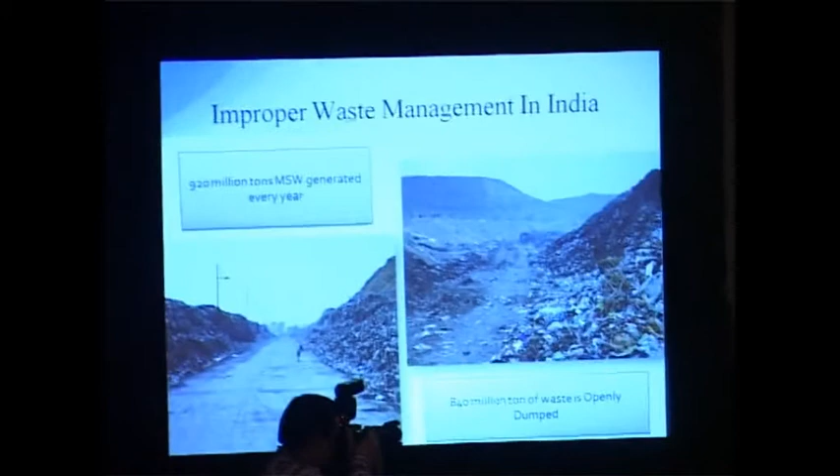Talking about the Indian scene, where 920 million tons of waste is generated every year, and out of which 840 million tons of waste is openly dumped, solid waste management becomes a challenge in the Indian scene. Here we are left with two options. Either extract the energy from the mixed waste, which contains toxic and inert material and significantly low calorific value, or process it beforehand before mixing it.

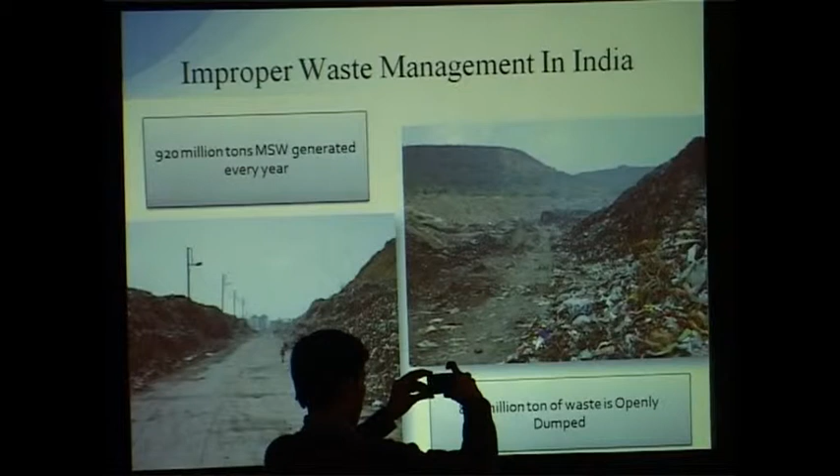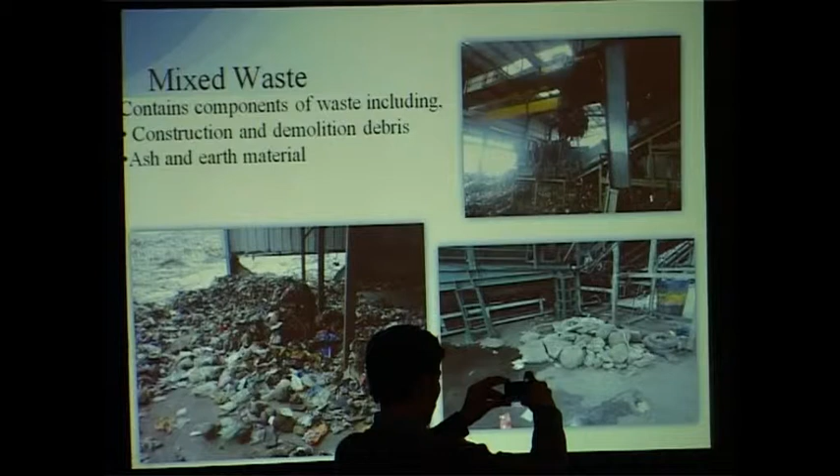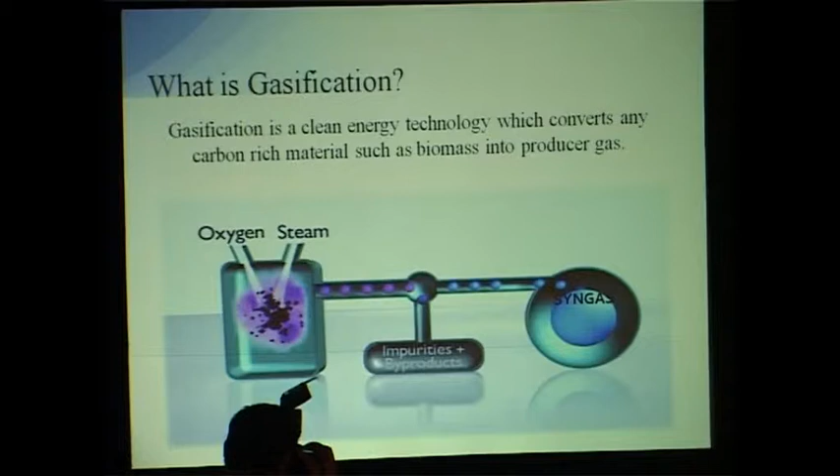Also, one of the most compelling challenges which the 21st century faces is to extract energy and meet the national and global demands while minimizing the impact on environment. Gasification is what we suggest and can help us meet those challenges. What is gasification? Gasification is a clean technology which converts any carbon-rich material, such as biomass, into producer gas, which can further be used as cooking gas. Now the question is, why only gasification?

RDF, which contains low calorific value, makes it difficult to utilize it for energy extraction. Biomethanation requires pure organic waste as feedstock, which is the major challenge in the Indian scenario. Coming to incineration, the emission of air pollutants such as ash contents further deteriorates the atmosphere, whereas landfill requires large and secluded areas. And in biocomposting, heavy metals enter into the food chain.

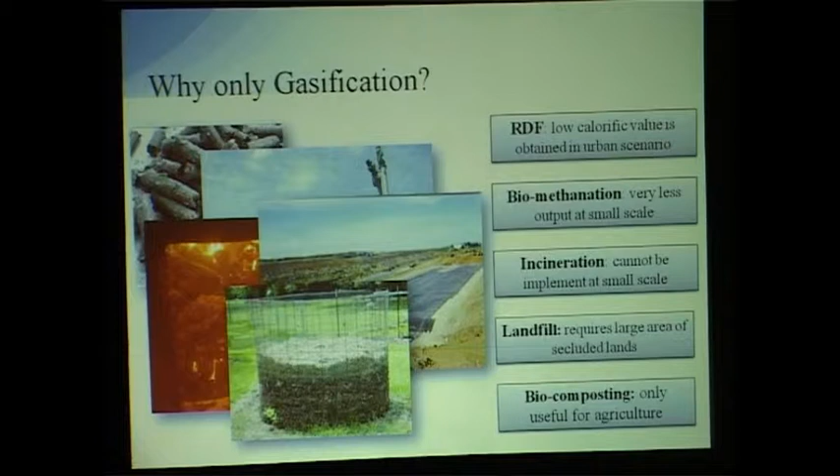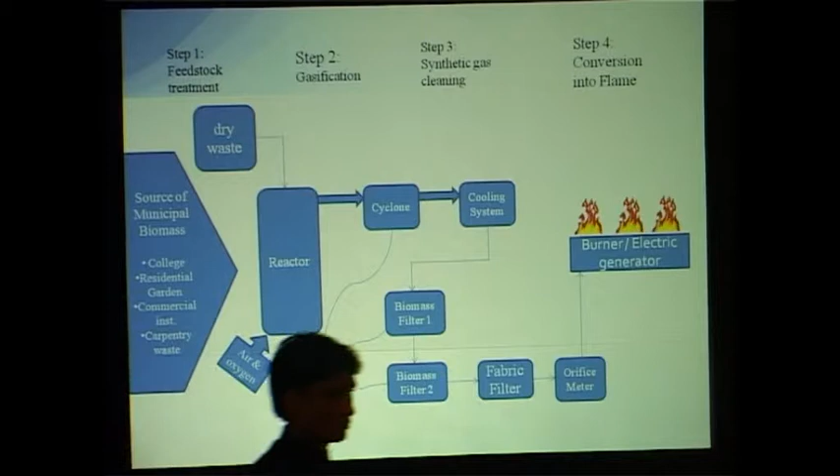What exactly is the gasification process? The waste is collected from the college, garden waste or agricultural waste, which can be put into the reactors in a dry state in a limited amount of oxygen, from where it goes to the cyclone condenser where it is cooled, and from there it goes to the filters, filter 1, filter 2 and the fabric filter, where the tar is separated out. The tar can further be used as manure and also for road construction. So the byproduct is itself useful.

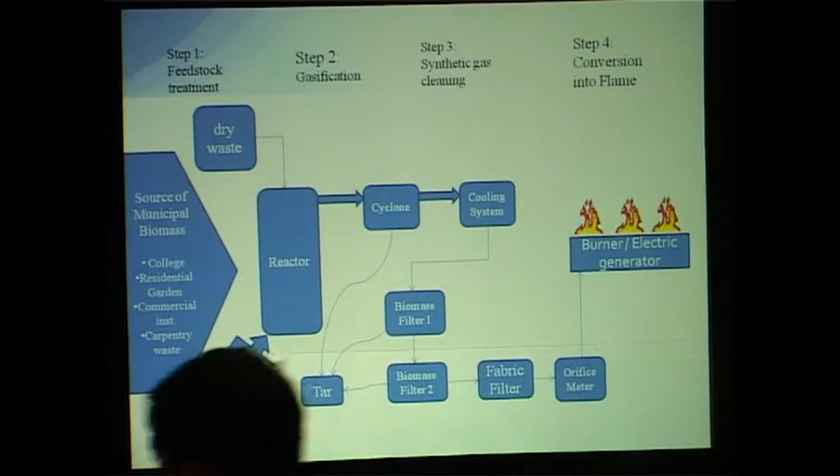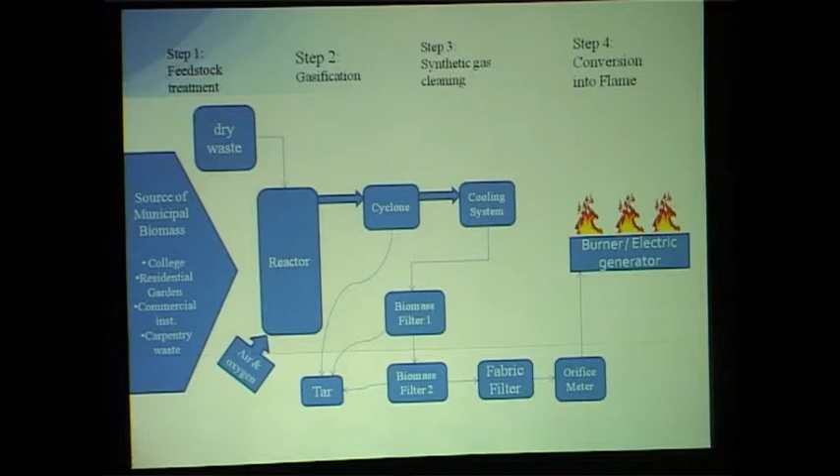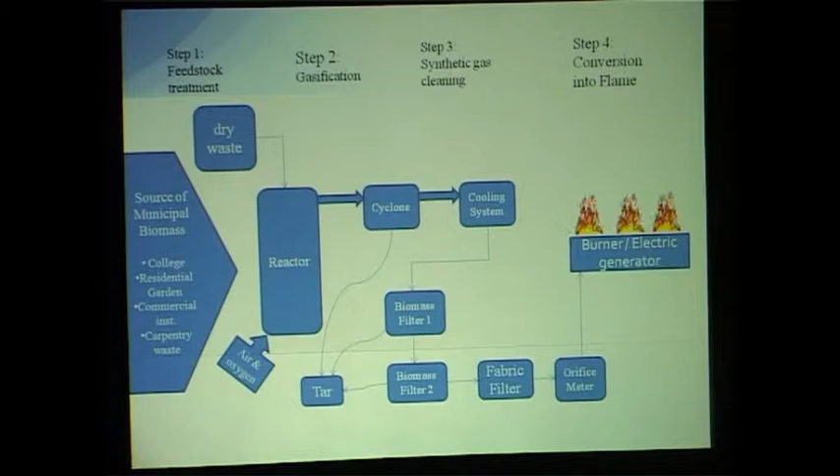Once the gas is produced, it goes to the burner where it can be used as cooking gas. Here I would like to bring to your notice that filter 1, filter 2 and the fabric filter consist of waste itself. Filter 1 and filter 2 consist of biomass, and the fabric filter consists of fabric waste. So ultimately it is an integrated system which processes waste and which is made up of waste.

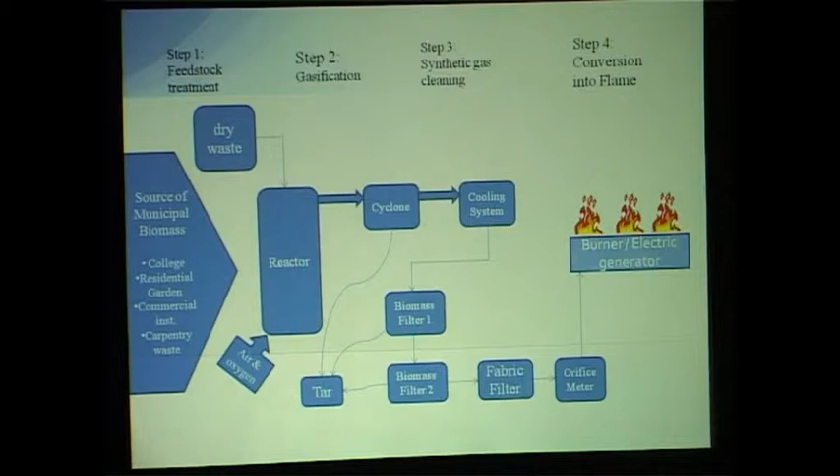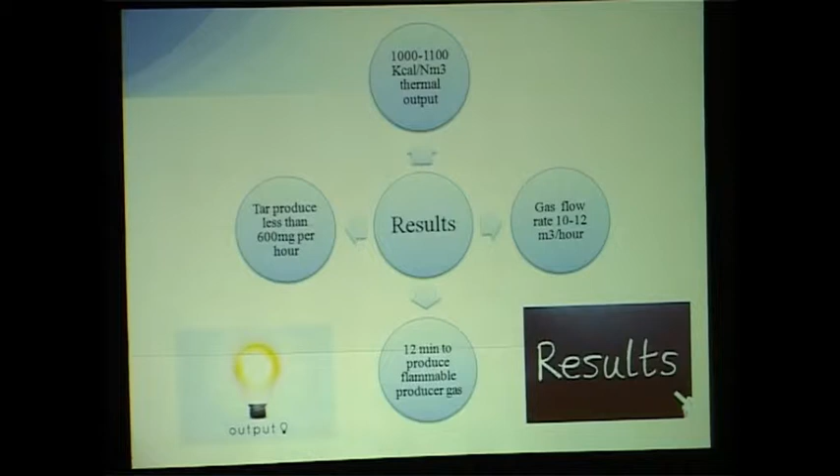Coming to the results, within 12 minutes, flammable producer gas can be produced, and the gas flow rate is around 10 to 12 cubic meters per hour. The uniqueness of the technology is that it is portable in nature. Any type of biomass can be used as fuel. It is inexpensive compared to other technologies on a small scale, and we are suggesting this technology on a small scale itself. It can work anytime, 24 hours a day, and the products and byproducts are useful, so it makes a viable concept.

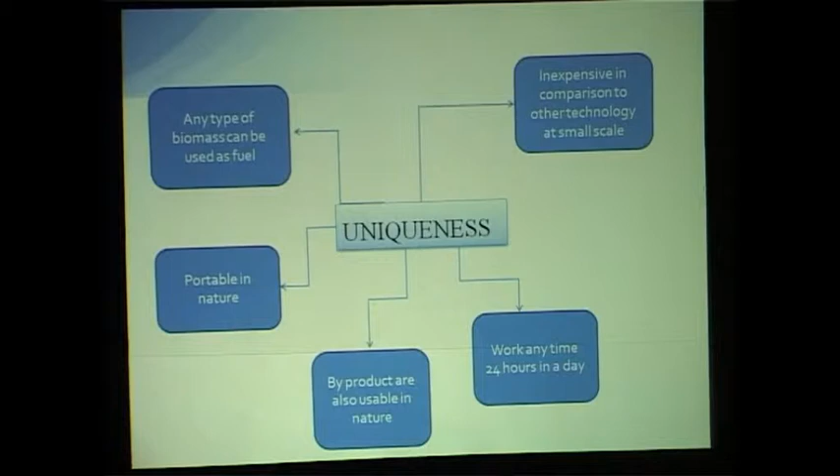For the financial aspect, I would ask Anurag to continue. Okay. Good afternoon, everyone. I would like to expand on the financial aspect and policy implementation of this project.

As discussed earlier, gasification is a technology which is well applied in the area of mass cooking. So we have chosen a government scheme called the midday meal scheme. It is an initiative taken by the Government of India where cooked meals are provided to primary and upper primary students. It aims to prevent classroom hunger and to improve the nutritional status of poor students who are unable to get a good meal.

Now, there are a few major problems which these government schools are facing. Firstly is the lack of availability of fuel, that is, LPG cylinders. Second thing is that the cook cum helpers who are cooking the food are unable to manage the cost of LPG cylinders within the budget given by the government.

And the last, which is the major problem the Government of India is facing, is that after the removal of subsidy from the LPG cylinder, an extra burden of 752 crore rupees came on this program. So what initial steps can be taken to start solving this problem at a small scale level?